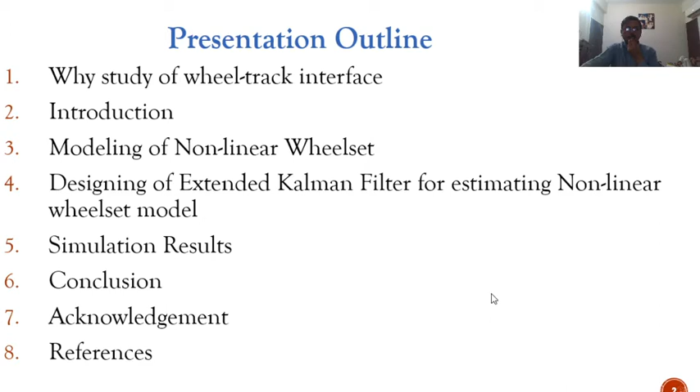So first, why is the study of wheel-rail interface being carried out? The wheel-track interface is the most significant part in railway dynamics, because the forces produced at the wheel-rail interface govern or guide the dynamic behavior of the entire vehicle. This contact force is complex and a highly nonlinear function of creep, and is affected by other railway vehicle parameters. Therefore, real knowledge of creep force is necessary for reliable and safe railway vehicle operation.

In this presentation, a model-based estimation technique is proposed to estimate nonlinear wheelset dynamics. In this work, the nonlinear railway wheelset is modeled and estimated using the extended Kalman filter algorithm. Both the wheelset model and extended Kalman filter are developed and simulated in Simulink, a toolbox of MATLAB software.

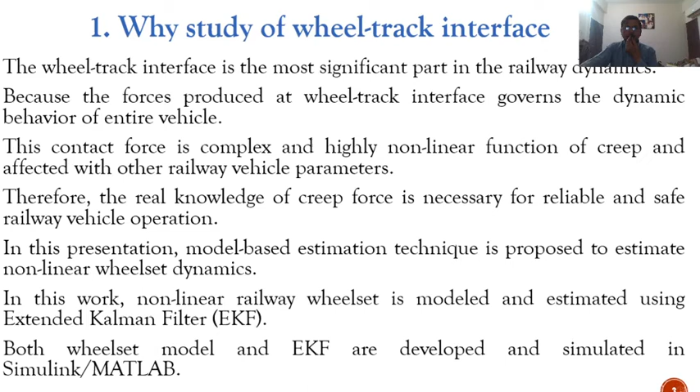Now for the introduction. As already discussed, the main element of any study of rolling stock behavior is the wheel-track interaction patch. All the forces which guide and direct the railway vehicle are transmitted via this narrow area of contact, the wheel-track interaction point. Therefore, knowing the nature of these forces is most important for any investigation of general railway vehicle behavior.

The wheel-track condition information can be detected in real time to provide traction and braking control schemes for re-adhesion.

In the publication of Dr. Imtiaz Hussain, the development of techniques based on the Kalman filter was proposed for estimation of wheel-track interface conditions in real time.

However, in this chapter, because the Kalman filter is suitable for linear systems, due to the nonlinear nature of wheel-rail dynamic behavior it is difficult to use for entire operating conditions.

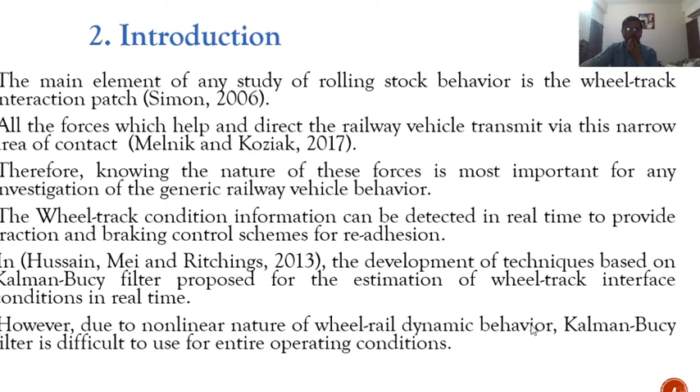Another model-based technique using the unscented Kalman filter is proposed in the literature for estimation of creep forces as well as friction coefficient from the behavior of the traction motor. However, the estimators in this application seem unreliable in some critical track conditions, and work is still needed to monitor these wheel-rail parameters more effectively in real time.

On the basis of a fitted nonlinear model, the extended Kalman filter can be adapted to identify the wheel-track interaction forces and moments that take into account the interface nonlinearities.

Along with this, I also reviewed some detailed literature. After reviewing this literature on condition monitoring of railway wheelset dynamics, it is observed that the problem of analyzing wheelset conditions and updating them to a desired situation still needs to be improved, in order to accomplish the expectation of railway vehicles being really high speed, high comfort, more safe, and an economical means of transport across the world.

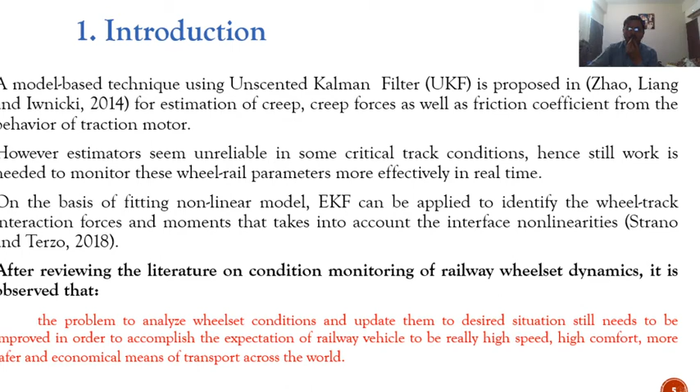So that was a little introduction and background of my work, and now modeling of the nonlinear wheelset. The motion of the railway vehicle is directed by interaction forces produced at the wheel interface. These forces change nonlinearly with respect to creepage and are affected by other unpredicted variations in the adhesion conditions. A single solid axle wheelset, as shown in this figure, is taken for modeling and estimation of wheel-rail conditions.

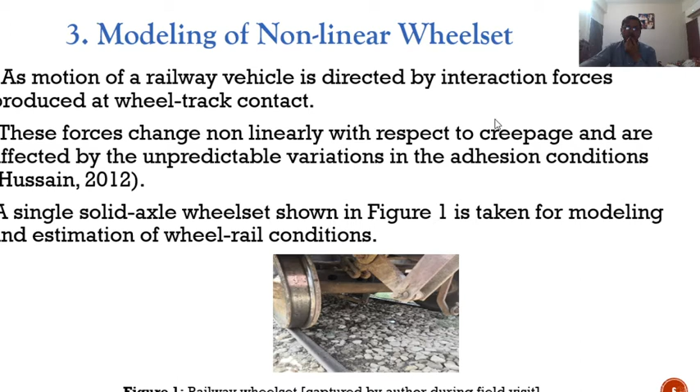As already discussed, in modeling the nonlinear wheelset, creepages are most important. The creepages, which are actually the relative speed of wheel to rail for the right and left wheels, are expressed here in these equations. This is the creepage of the right wheel in the longitudinal direction, and this is the creepage of the left wheel in the longitudinal direction. This is the creepage of the right and left wheels in the lateral direction, because both right and left wheels have the same lateral creepage. So this is depicted here, and in equation 4 the total creepage of the wheels is shown like this.

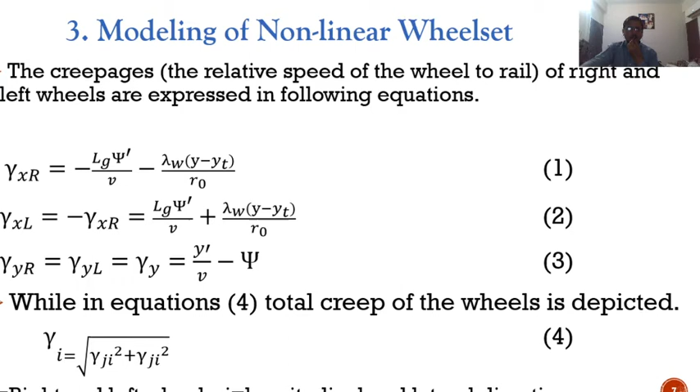Here, i means the right or left wheel, while j refers to the longitudinal or lateral direction.

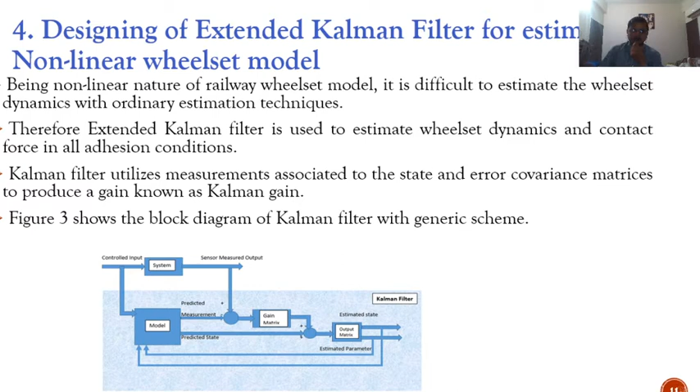Kalman filter utilizes measurements associated to the state and error covariance matrices to produce a gain known as Kalman gain. Figure 3 is the block diagram of the Kalman filter for the general scheme. This is actually the block diagram.

As the extended Kalman filter, which is the extension form of the Kalman filter, here we are going to use, it linearizes the current mean and covariance by assessing Jacobian matrices and their partial derivatives.

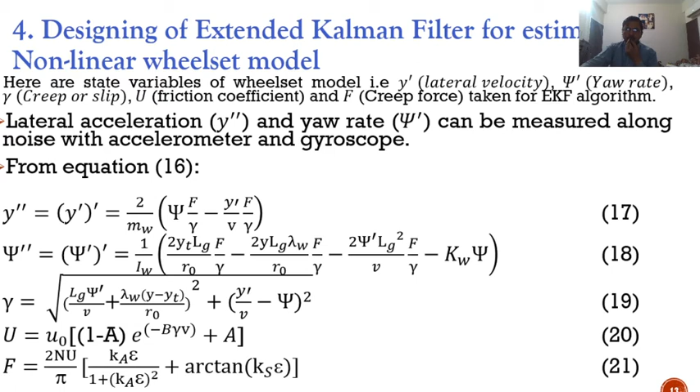Equation 16 to 17, these are 17 to 21 here. These are actually the continuous equations which are required to be discretized by using the forward Euler method in order to design the extended Kalman filter, because the extended Kalman filter works in discrete form.

As the extended Kalman filter uses a two-step predictor-corrector algorithm, so this is the predictor step. These are equations for the predictor step. So here this is the process state, and here this is the error before going to measurement, and this is the equation for the corrector step.

Here this is the Kalman gain. These are actually H and... yes, so these are actually the Jacobian matrices, F and H.

This is the process state which is going to be updated after the measurement or during measurement, and this is the noise error. These are actually the terminologies which are given in this table. So it is not a matter of confusion or any doubt.

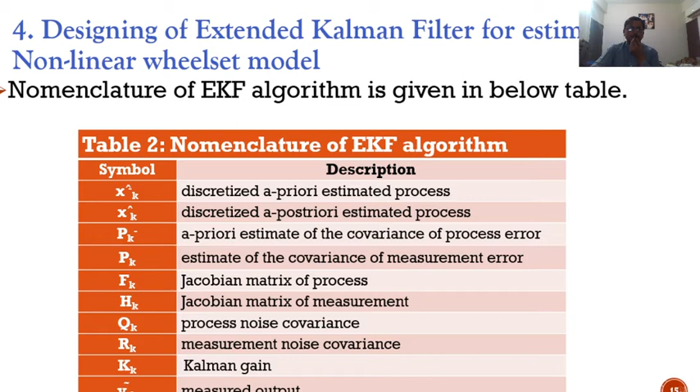So this is actually the designing of extended Kalman filter in order to estimate the nonlinear wheelset model's dynamics. Here are the simulation results. The simulation model of nonlinear wheelset and extended Kalman filter are developed in Simulink and are simulated with 50 microsecond step size.

As the vehicle is kept at constant velocity, meaning no motor torque is applied, only random track disturbance of plus minus 7 millimeter magnitude in lateral direction is applied as input to the model for exciting lateral dynamics.

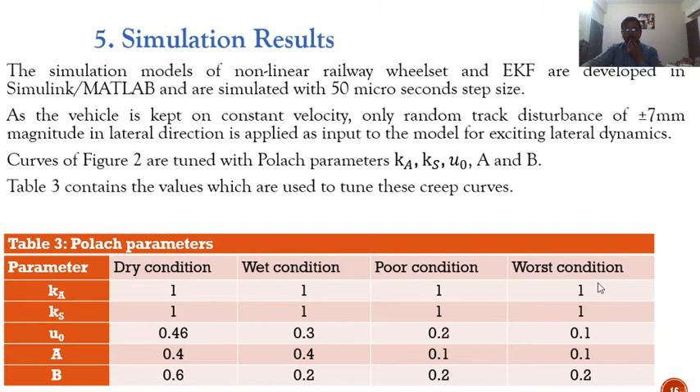Curves of figure 2 are tuned with Polach parameters Ka, Ks, mu naught, A and B, and this is the table in which we define or derive the values for dry conditions, wet conditions, poor conditions, and the worst condition.

Other than these, the extended Kalman filter tuning parameters are measurement noise covariance of inertial sensors and process noise covariance for the entire range of track conditions, which are set in equations 27 to 30. The measurement noise covariance matrix in equation 27 is calculated by adding noise power for accelerometer and gyro sensor.

The process noise matrices of equations 28 to 30 are calculated on the basis of fine tuning of results. So here these are actually the process noise covariances: Q1 is for dry condition, Q2 is for wet condition, and Q3 is for poor and worst condition, as we have taken 4 conditions of track.

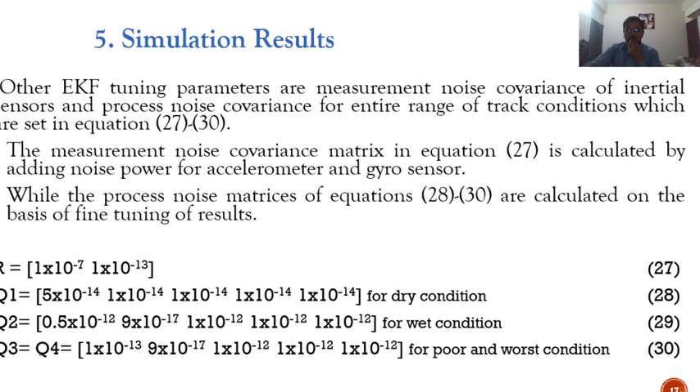Following tests are performed on the wheelset with the extended Kalman filter algorithm: dry track condition, wet track condition, poor track condition, worst condition, and last is transition from dry to worst condition. Here in this presentation, we take test number 5, because this is the summary of all 4 above tests. So to save time, we only show the results of this last test.

This last test is the transition test from dry condition to worst condition. In the results, we calculate lateral velocity and yaw rate of the wheelset as well as creep and creep force computed along with errors for all adhesion conditions.

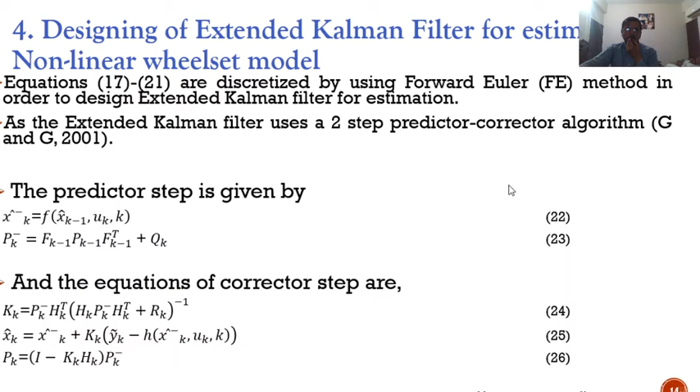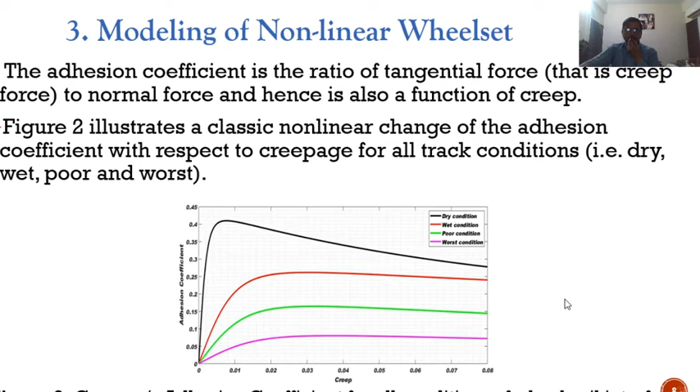These are actually the curves of figure 2, as you will see. Yes, these curves: dry - this is the dry condition curve, this is the wet condition curve, and this is the poor, and this is the worst track condition. So we took all these curves.

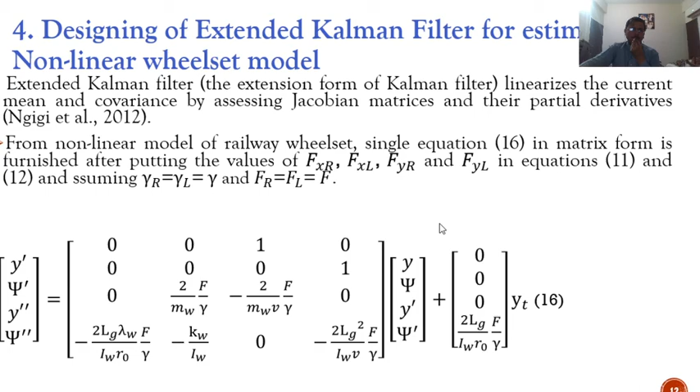Here we were on simulation results. During simulation, the adhesion condition changed every 2 seconds from dry to worst adhesion conditions over the first 8 seconds of simulation time, and then the condition again changed from worst to wet, because we set a 10 second simulation time.

In the first 10 seconds, the condition was changed from dry to wet, then poor, then worst, and after 10 seconds we again change the track condition from worst to wet. The graphs from figure 4 to 7 show the changes of adhesion conditions and match estimated results with the actual results.

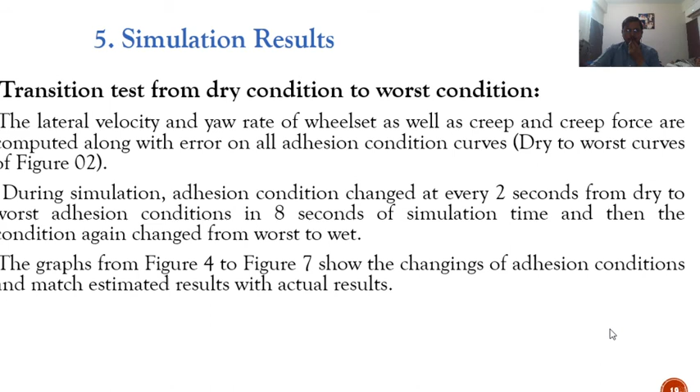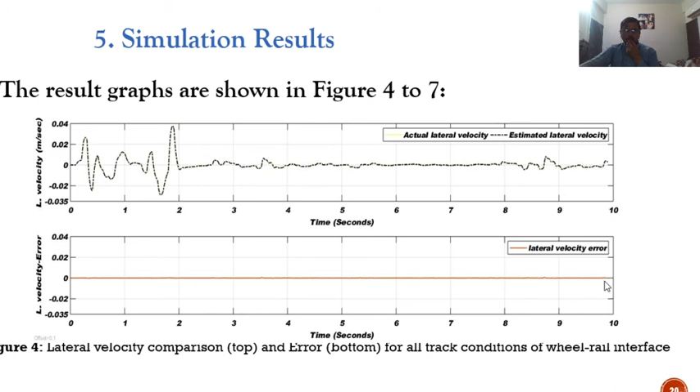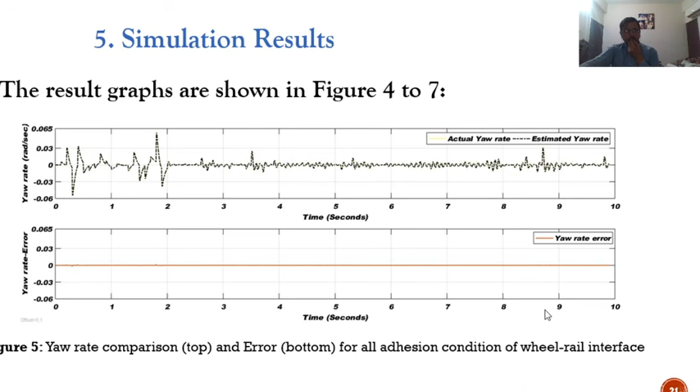Here this is the computation of lateral velocity. Both actual and estimated results are very much matching to each other, and here the result error is shown as almost 0. Similarly, this is the yaw rate computation - actual and estimated yaw rate, and this is the error. Here again the error seems 0 with respect to the actual and estimated results.

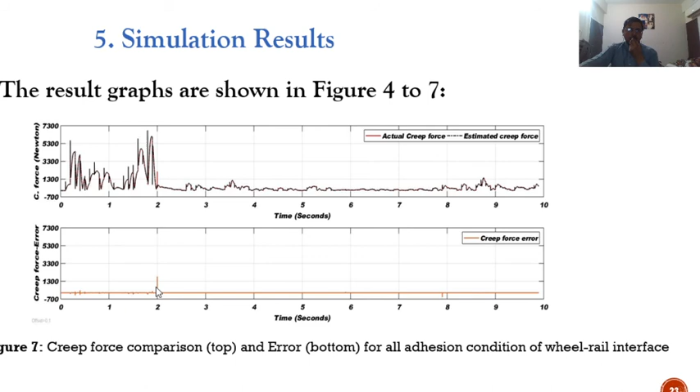So in figures 4 to 7 we observed that the extended Kalman filter is a valid estimation technique to estimate wheelset dynamics with authenticity. However, estimated creep force errors in figure 7 become higher for a few moments during simulation, as a spike seen at 2 seconds due to sudden change of adhesion conditions from dry to wet, like here. So one spike is seen.

Overall, the extended Kalman filter estimates the wheelset dynamics perfectly for dry, wet, poor and worst adhesion conditions, and can be used for condition monitoring of rolling stock.

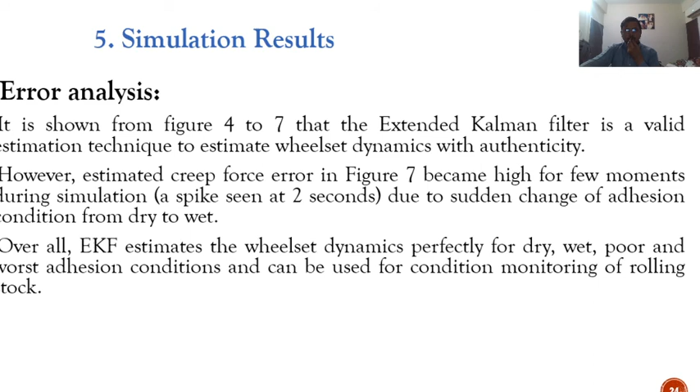This research uses the extended Kalman filter to estimate lateral velocity and yaw rate of the railway wheelset as well as creep and creep forces of the wheel rail interface. This whole work is validated through simulation in MATLAB. The extended Kalman filter not only estimates wheelset dynamics for dry, wet, poor or worst particular adhesion conditions, but perfectly estimates for transition of all track conditions during simulation.

Further, the research is going to estimate the wheel track dynamics in traction and braking modes. Also, work is going on to implement the estimation work on an FPGA platform for further commercialization.